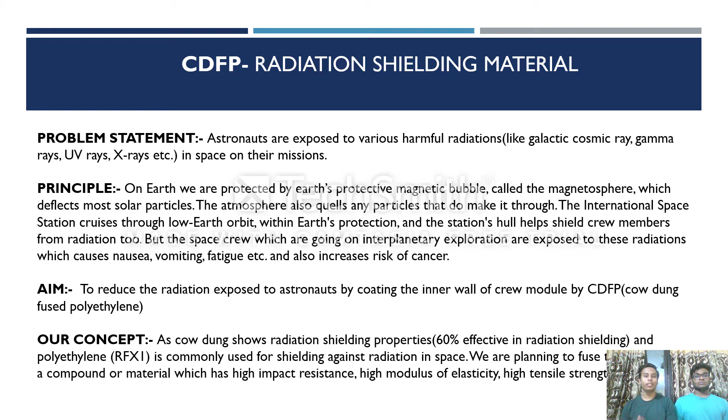And in this model, we are planning to fuse them and make a compound or material which enhances the mechanical properties like impact resistance, modulus of elasticity, high tensile strength, and hardness. Materials required: low density polyethylene, which is LDPE, cow dung, MAPE, which is maleic anhydride graft polyethylene, and silicon oil.

On an experimental basis, low density polyethylene, LDPE, was taken 200 gram with 2% MAPE and 4% silicon oil and other filler loadings. Sample preparation: the cow dungs were sun dried for a period of 4 months, after which they were crushed to smaller aggregates using a hammer mill.

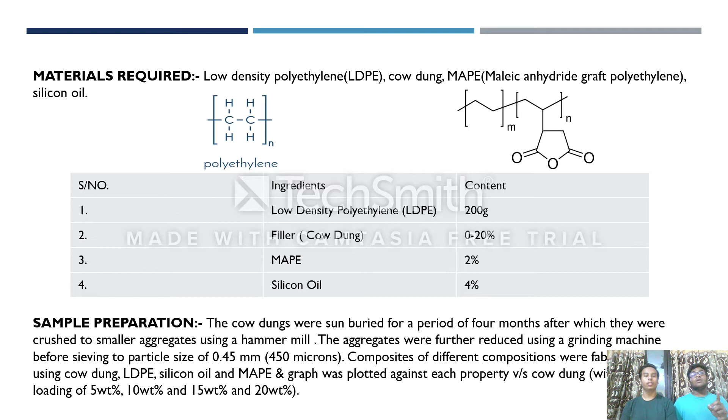The aggregates were further reduced using a grinding machine before sieving to a particle size of 0.45 mm, which is 450 microns. Composites of different compositions were fabricated using cow dung, LDPE, silicon oil, and MAPE, and a graph plotted of each property versus cow dung filler loading of 5 weight%, 10 weight%, 15 weight%, and 20 weight%.

So the results and observations are: the first one is the Charpy impact strength test. The Charpy impact test, also known as the Charpy V notch test, is a standardized high strain rate test which determines the amount of energy absorbed by a material during fracture.

The addition of 2% polyethylene graft maleic anhydride, that is MAPE, to various systems led to higher impact resistance, and this was due to the improved interfacial bonding offered by the coupling agent, MAPE. The addition of the coupling agent helped to improve the inherently poor bonding between the hydrophilic cow dung and the hydrophobic polymer matrix and helped to recover some of the impact strength.

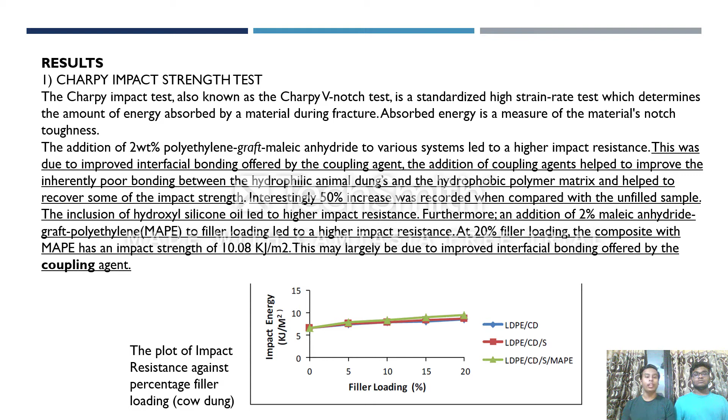Interestingly, 50% more was recorded when compared with the unfilled sample. The inclusion of hydroxyl silicon oil led to higher impact resistance. At 20% filler loading, the composite with MAPE has an impact strength of 10.08 kJ per meter square. This may largely be due to the improved interfacial bonding offered by the coupling agent, MAPE, as you can see in the graph.

Second, the result was based on modulus of elasticity. An elastic modulus is a quantity that measures an object or substance's resistance to being deformed elastically when a stress is applied to it. The modulus of elasticity increases with the increasing level of filler loading in the sample.

The incorporation of hydroxyl silicon oil led to a significant decline in modulus of elasticity when compared to the sample without silicon oil. This could be a result of the wetting effect of the oil on the filler particles. The addition of 2% MAPE increases modulus of elasticity. Cow dung filled LDPE, which is low density polyethylene, has a higher modulus of elasticity. This could be a result of reinforcement provided by straw, which forms a large percentage of the cow dung. We can see in the below graph.

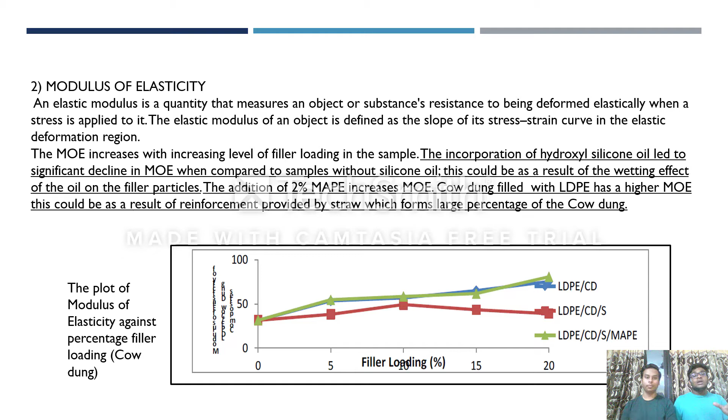Now, the third observation was the Brinell hardness test. The Brinell scale characterizes the indentation hardness of materials through the scale of penetration of an indenter loaded on a material test piece. It is one of the several definitions of hardness in material sciences. It is seen that with the increase in fiber content in the composite, hardness value improved, although the increment is marginal, but a gradual increase in hardness with weight fraction of fiber was observed.

It clearly indicates that inclusion of cow dung fillers improves the load bearing capacity and the ability to withstand indentation on the composites. The inclusion of MAPE led to a significant increase in the hardness of LDPE composite. As you can see in the graph, the LDPE, MAP and silicon oil, all the contents in that graph are at the peak in the comparison.

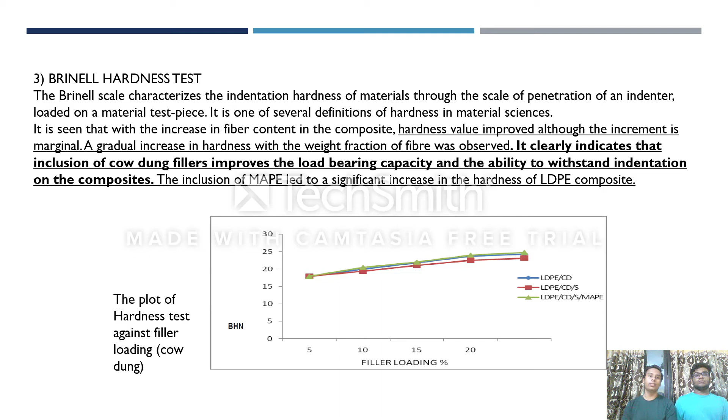Fourth was the tensile strength. Tensile strength is a stress a material can withstand without permanent deformation or a point at which it will no longer return to its original dimension. The tensile strength at the yield decreased with increased filler loading. This could be attributed to poor interaction between the fillers and the matrix, resulting in poor bonding.

However, the composite with MAPE, which is maleic anhydride polyethylene, shows slight improvement in tensile strength at yield compared to sample without MAPE. From the result obtained, addition of silicon oil led to a slight increase in the yield strength of composite, although the unfilled sample still showed higher yield strength.

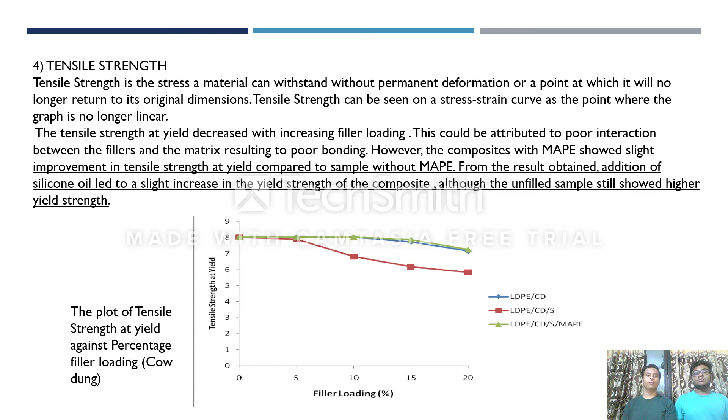Now, the fifth property is the true stress at break. The true stress is the applied load divided by the actual cross-sectional area of material. True stress at break, sometimes regarded as the rupture strength of the material, decreases slightly with increase in the filler loading for all the composite formulations. This could be as the result of increase in the brittleness of the composite.

The incorporation of MAPE did not make a significant change in the true stress. However, only a slight increase was observed in the sample with low filler loading. It is expected that if the MAPE content is increased beyond 2%, better strength will be achieved.

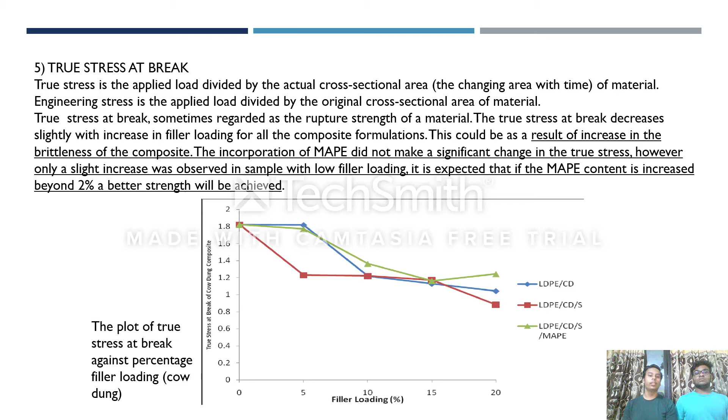Now, conclusion. The conclusion of this research shows that cow dung can be used as a reinforcing filler in thermoplastic. So, the elastic modulus of cow dung filled LDPE, which is low density polyethylene, increased with increasing filler loading. So, MAPE, maleic anhydride polyethylene, was an effective coupling agent for LDPE composite since 2% weight caused an increase in the modulus of elasticity in cow dung filled LDPE composite.

So now, impact strength and hardness of cow dung filled LDPE increased with increased filler loading. Increase in cow dung in LDPE matrix caused the true stress at break of the specimen to decrease. For tensile strength and stress at break to increase, more MAPE should be added in composite. So now all this information and research material we have got from the source and we have attached it below.

And our role in this project was that we were trying to deliver an idea to make the inner structure of the crew module with CDFP, which is a radiation shielding material, as it's made of cow dung, which is itself a radiation shielding material, and polyethylene, that is RFX1 especially to be mentioned. And this material also enhances physical properties like impact strength, impact resistance, hardness, as discussed above.

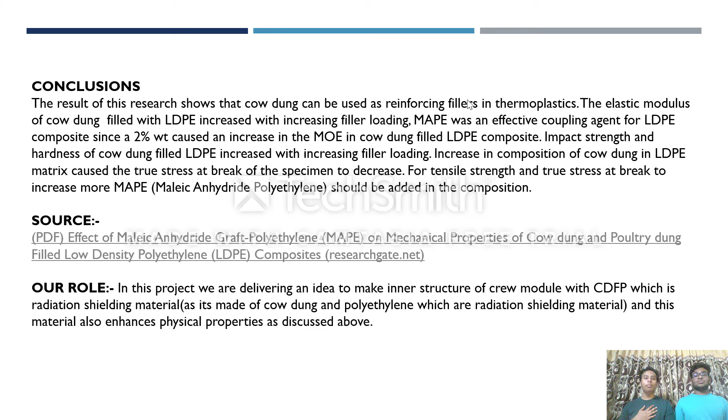And if by chance there is any impact or any turbulence in the system, then it is also impact resistant and hard, and it also enhances the physical properties of this spacecraft module.

So we hope that you like our project, and we also hope that it will really be brought to life or reality soon, as this is just a research based model, and we have just formulated some of the stuff. And as we humans are now exploring Mars and Moon, and we want to inhabit those planets or satellites, we need to be ready for those missions. And as there is so much radiation out there, if this technology could help in saving us from this radiation and prolonging the life of the missions, I think this will be used.